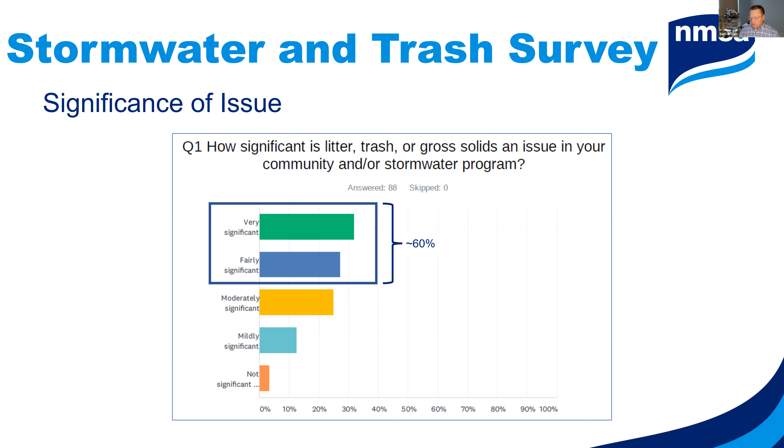So this checks the box on the question: is this something even worth getting into? Is there a lot of interest? Is it significant enough of an issue at the local level? And the answer that we got from this survey was yes, it is.

The second was we wanted to know about trash capture measurement - what metrics are used and who's doing this work. So the first was, do you even measure trash capture? And if so, do you perform trash capture, do you measure it, and if you do, who leads this effort?

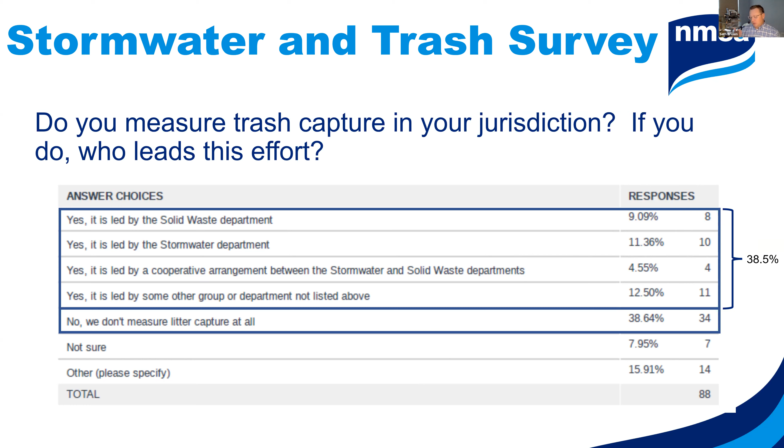So what we found is about an even split between those who say no and those who say yes, and then some that fell into the other category - not sure, or maybe they kind of do, kind of don't. But the point is that there's a significant number who do have trash capture programs. The other thing to notice is that there was not a consensus about who leads this - is it the stormwater program, the solid waste department, a cooperative, or something else? So not a lot of consensus there. That's interesting to know.

That's something interesting as a takeaway, I think. We wanted to know, how about metrics? How do you measure that? Again, this is not a consistent thing. We found there's an even split between looking at weight—whether dry or wet weight—volume, or something else. So clearly there's no consensus on what the metrics are related to measurement, or metrics related to trash capture.

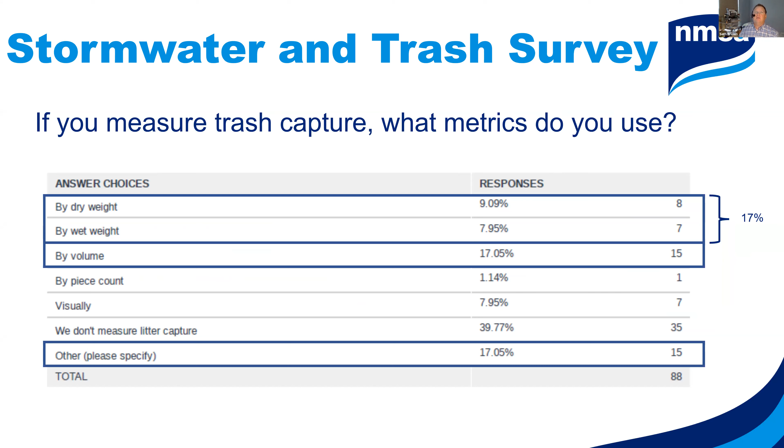That's another interesting takeaway that informs us what the challenges are for MS4s in stormwater and trash. We also asked about the elements—where does this land? If you've got a trash control or trash reduction program, where does this land? Not surprisingly, most of the time it's in the public education area. Public education outreach is part of the MCMs, the minimum control measures. Part of MS4 phase 2 permits is public education outreach and engagement. This checks one of those boxes very well.

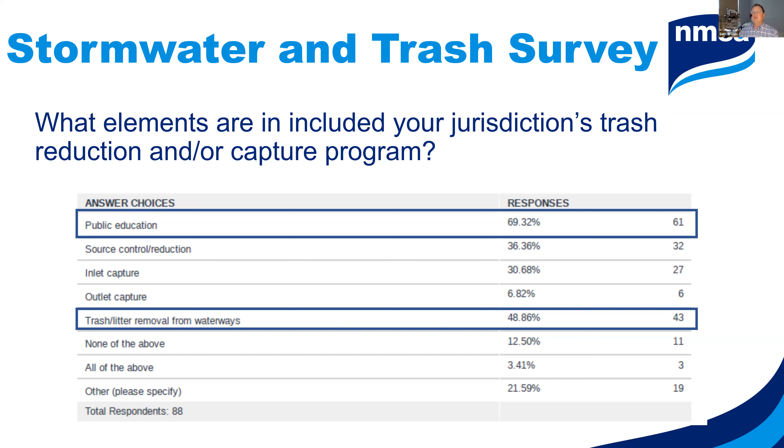It's out there—you see litter cleanups, stream cleanups, adopt a road or adopt a highway. All of those things tie in here. But there's also significant focus on just trash removal from waterways themselves—primarily saying we need to get this stuff out of our waterways, not just checking the box for public education. It should be noted that respondents could check more than one box in this context.

Something we'd heard as we went along with this effort with EPA in the Trash-Free Waters partnership we were involved with, was whether trash capture and trash in stormwater issues is a solid waste issue or a stormwater issue. And if it's a little bit of both, do solid waste and stormwater programs coordinate well? That was a premise we had—this could be a challenge.

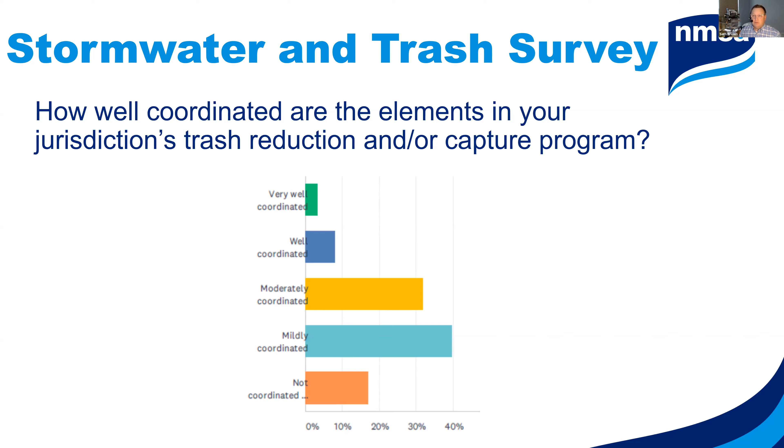Sure enough, we asked the question about how coordinated this is between the different departments that might be involved, stormwater groups or solid waste or others. It looks like moderate to mildly coordinated kind of dominate here. So there's an opportunity to try to increase this coordination to have more effective trash capture and trash reduction at the community level. And we asked what types of things could help make that happen.

Just help trash capture and reduction generally writ large. It's interesting to note there were multiple responses available to respondents, but you can see some stood out more than others. One is just looking at leadership and having webinars like this, frankly, a community of practice, an online resource. This is all information based—I think folks just want more information about how to do this effectively.

I think another interesting thing is there was significant, actually the most support, or the second most support, for a crediting system—and I know we'll hear about that on the California aspect, but we're looking beyond California as well. If there's a way to capture this and credit it in permits, then maybe there'd be more support for this. That's another interesting takeaway, I think.

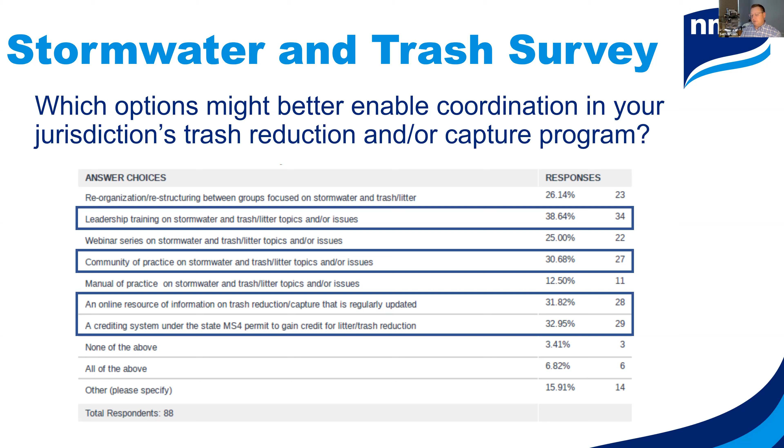So, okay, I'm going to wrap up now and just say that some of the major takeaways we had from this survey is, again, that it's a significant issue. There's this trash in general—I think there's just more awareness overall on plastics and the impact on the environment. So it's being seen as, or it is seen as, a significant or very significant issue.

Most communities have trash reduction or trash capture in their MS4 permits, but most do not track or report that at the same level. There's a lack of consistency in the metric of how much we capture - weight, volume, pieces, whatever it is. There's also a lack of consistency in who leads this, whether it's solid waste or stormwater or some other department. So there's not a consensus or consistency there, and no clear agreement on how to address this coordination.

There's a lot of different things we can do, but things like education, outreach, webinars, and community of practice seem to resonate the most. We also see interest in a regulatory crediting program to incentivize action. If this is going to be written into your permit, having consistent metrics and consistent crediting would generate more support as well.

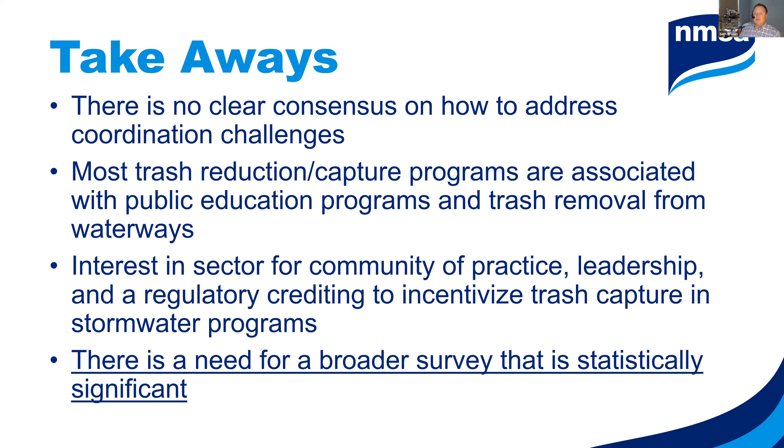One of the big takeaways is that there's a need for a broader, statistically significant survey - we want to do that. I did want to mention that NMSA is involved with the new ASTM Committee on Stormwater Control Measures, E64. They're developing a trash capture standard right now, based upon the Caltrans standard.

This ties into our stormwater testing program called STEP, which EnviroPod is a supporter of as well. So this is something to look for in the near future. We feel like standardization is going to help us move forward, and how we measure performance related to trash capture and reduction.

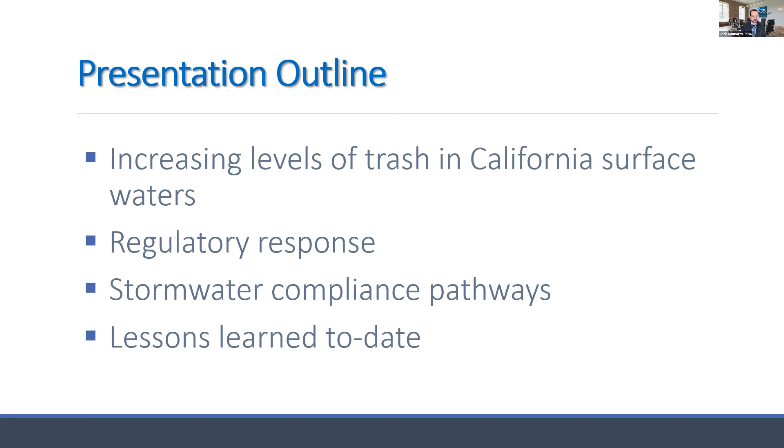I always like to start with this - California's definition of trash or litter. It's in the government code, and it basically comes down to a broad definition of any improperly discarded material - and it's not just plastic, it could be other materials as well - that's thrown or deposited on land or the waters of the state.

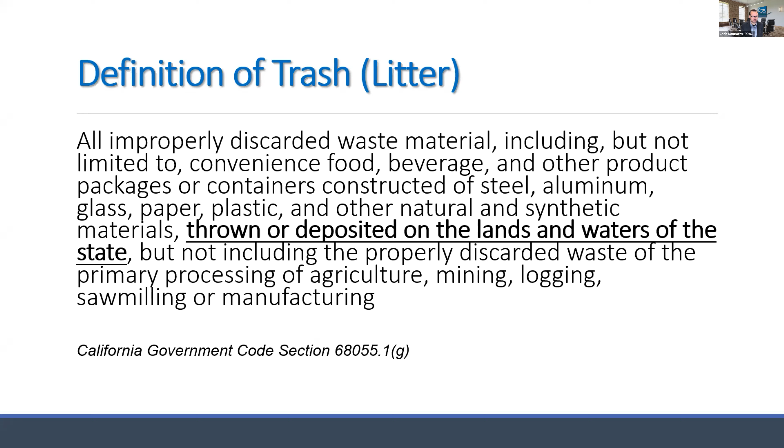One thing I want you to notice is that this definition of trash doesn't have any size associated with it. So although we've focused mostly, and my talk will be mostly on macro trash - greater than 5 millimeters in diameter - obviously there's been a lot of work, exponentially growing, on the scientific studies and our understanding of sources and impacts related to microplastics and micro trash that is less than 5 millimeters. So this definition covers that micro trash as well.

So I want to take you back to the late 90s, really when this first started to get attention from a water quality perspective in the state of California. Mostly that happened through documentation and observations, both visual as well as quantitative, of the levels of trash we were seeing in waterways.

So these are two examples here: one, the lower LA River. This is at a boom that still exists in the lower LA River, which drains a very large catchment.

Remember, the LA River is for those of you who've seen Grease, where they race the cars in the concrete channels—that was the LA River. That is the LA River.

Coyote Creek up in San Jose is a much more natural system. It has riparian corridors, downed trees, and woody debris, and it blocks the transport. This is in San Jose, in the South Bay of San Francisco Bay.

So the State Water Board and MS4s collectively started collecting data in receiving waters back in the late 90s and into the early 2000s, and it was really pretty alarming, the levels that they were observing.

It was documented that there were impacts to beneficial uses established through the California Water Code and under the Clean Water Act. Those include wildlife, recreation, and navigation as well where applicable, as well as recreational uses including aesthetics. So we have not only full body contact recreation for swimming, bathing, and beaches, but also Rec 2 beneficial uses.

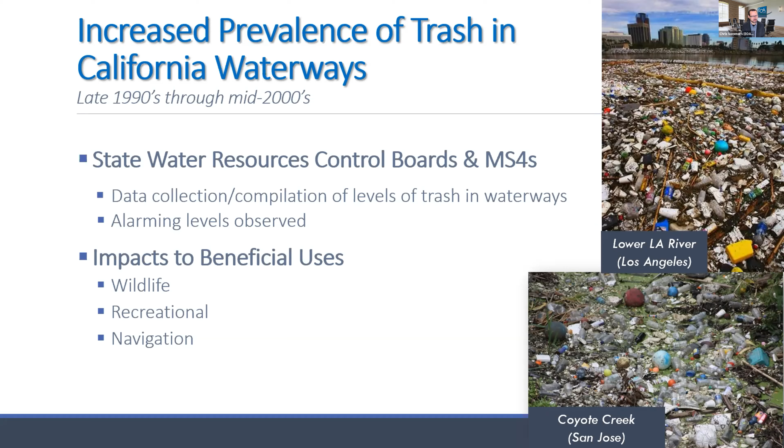Rec 2 includes pretty much just enjoying the natural waterways while you're next to them, picnicking by them, or hiking next to them. So this trash, not only from a wildlife standpoint, was potentially impactful, but also from a recreational standpoint as well.

Super important, especially for that last point, for California beaches. And so in the LA region and in the San Francisco Bay region, these data were used to list waterways in these two regions for impairments.

On the Clean Water Act 303(d) list as impaired by trash. And that really started the focus on: well, what are the actions that are actually going to be implemented? What's the program? In California, we have 9 regional boards that oversee water quality and 1 state board that oversees statewide policy. These 2 regions started to enact first the TMDL, which I think was possibly the second TMDL in the nation for trash.

That was back in 2008, adopted by the LA Regional Water Board. It established a water quality-based effluent limit for macro trash greater than 5 millimeters in MS4 discharges, basically saying there can be zero discharges of trash. They used the narrative standard to be able to establish this TMDL and the impairment.

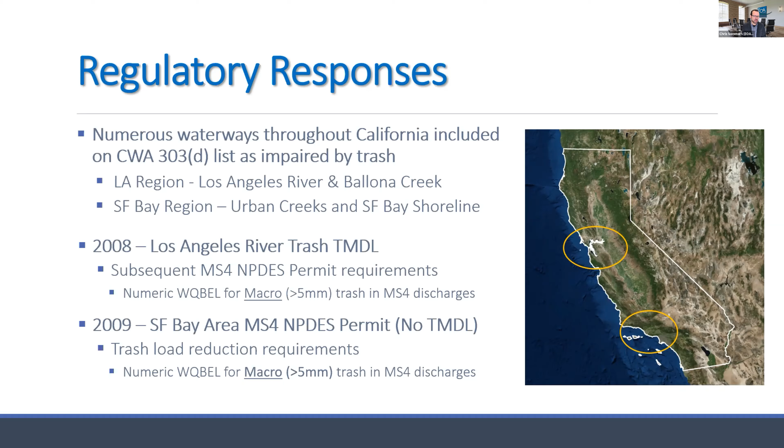But what the state did is it started to establish—it took a few years after that—but based on these 2 regions' efforts from a policy development standpoint, the state enacted a statewide adoption of amendments to the statewide water quality control plan. And it did 3 things.

One, it established a statewide narrative water quality criteria—a water quality objective, as we call them in California—for trash, which basically said no trash in adverse amounts in waterways. Secondly, it established a discharge prohibition for trash in stormwater and other pathways. So no trash in discharges.

And then third, it set, if you will, an alternative compliance program. And so it said, hey, instead of doing all these TMDLs on a watershed or water body basis, we're basically saying that all urban waterways throughout the state—and the data supported this—are impacted by trash, and that stormwater discharges are important pathways.

That seems to coincide with Seth's survey that people are realizing that stormwater discharges are important, and that we do have trash issues within our urban waterways that has grown over time. It also said that all stormwater dischargers can achieve the discharge prohibition by a time-certain date of 2030 at the latest.

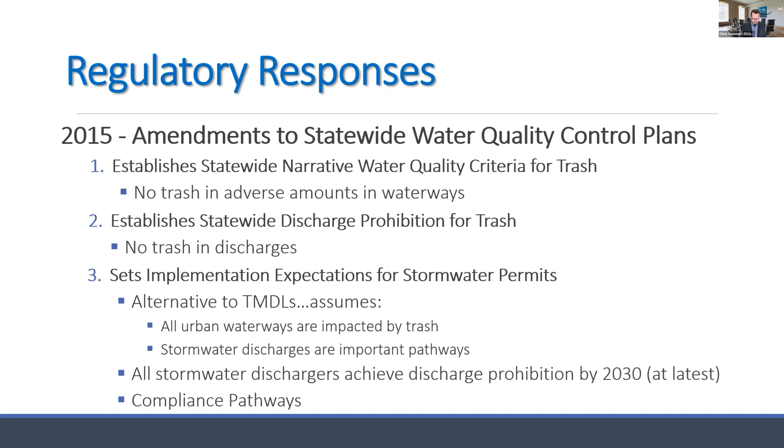And then they established these compliance pathways, which was really the important part—these alternative compliance pathways. So you can't hit zero in your discharge. What are we going to require you to do so that you're deemed in compliance with your discharge prohibition?

And so they gave two options, and these were the same options that basically were given in the LA region and the San Francisco Bay region. The first option was really the start of a whole industry of trash capture devices.

So it set a design standard based on data collected in the LA region: a treatment control, or series of treatment controls, that traps all particles greater than 5 millimeters—that macro trash definition—with design treatment capacity, a flow treatment capacity rate resulting from the 1-year, 1-hour storm event.

And so that set a standard that was used to start certifying full capture devices by the State Water Resources Control Board. And today there are over 40 of these devices now certified as full capture systems within the state of California.

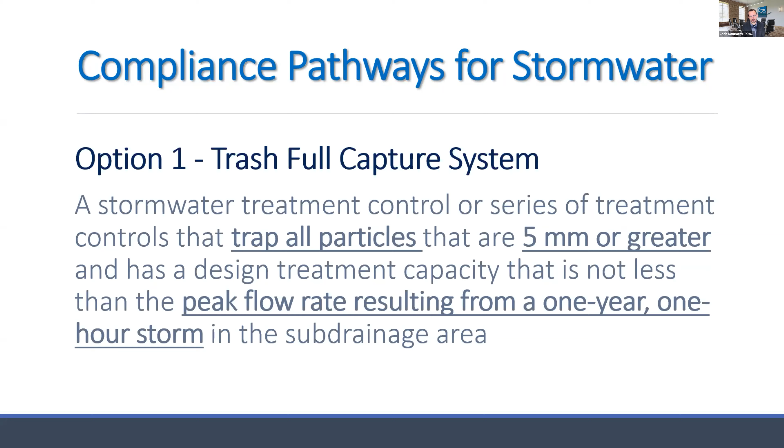There is an allowance for what they call multi-beneficial systems, which could include green infrastructure and other more naturally based systems. I work in the San Francisco Bay Area, so I help a lot of the MS4s throughout the region, just to give you a sense of where we are in Northern or Central California.

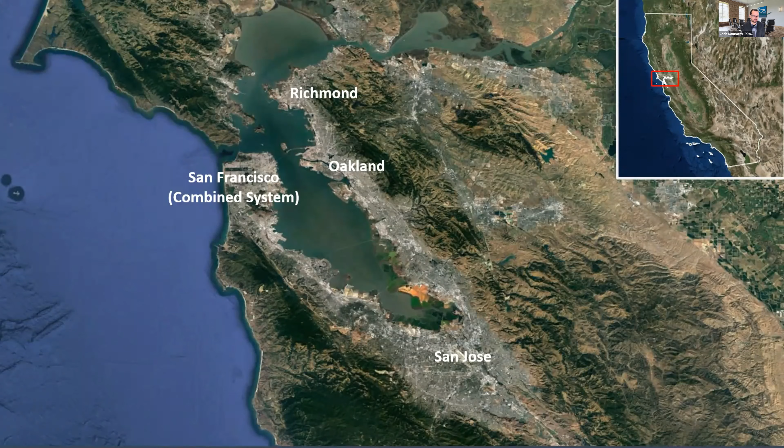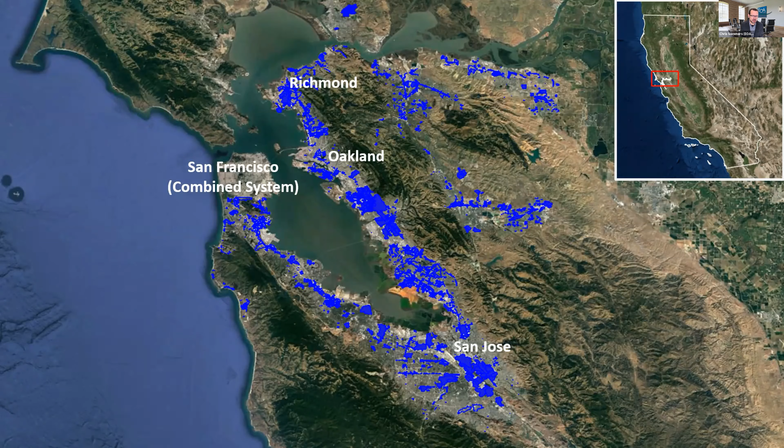I could show you a similar image for the LA region. LA alone has over 50,000 inlet-based devices and a number of other larger systems they've implemented as well. So a significant effort from a capital improvement program and retrofit program.

Option two is really everything else. It could include partially full capture systems to address some areas considered significant trash generating areas that drain to MS4s. But mostly it includes source controls, including what we call true source controls in California, which is really pollution prevention efforts, as well as institutional source controls, things like street sweeping and inlet cleanup.

These option two, or what they call track two systems or control measures in the state, have to be demonstrated as equivalent to the trash reduction that would occur if you installed a certified full capture system. So the question is, how do you measure that? How do you determine you're equivalent? They've established a process where you establish baseline trash levels on land, and then compare over time as a surrogate for the levels getting into stormwater and being discharged.

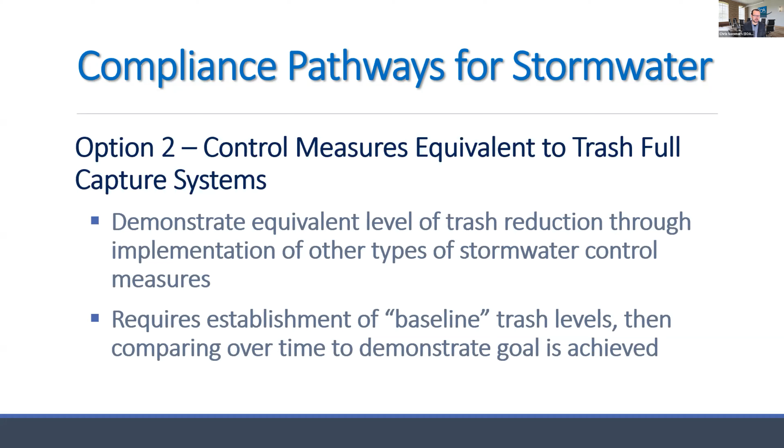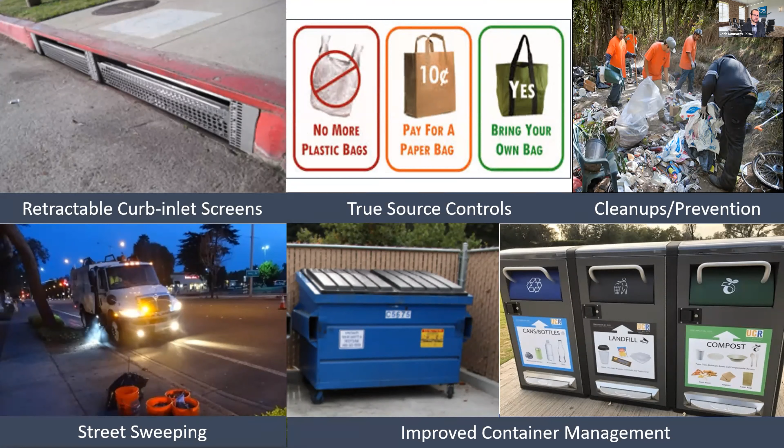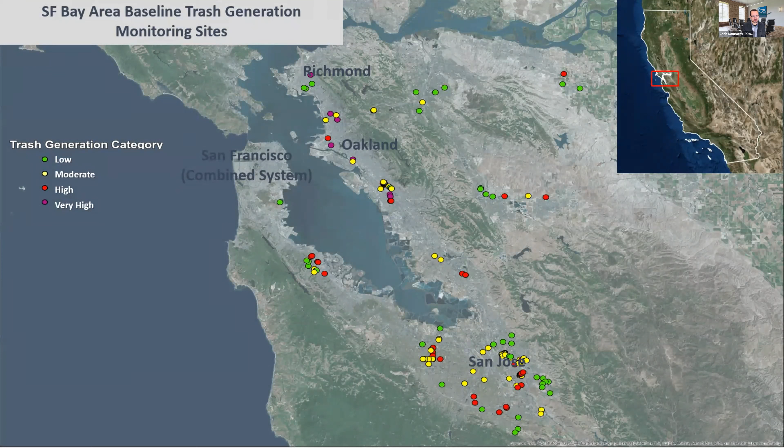So these are a few examples of both true source controls and institutional source controls that are out there. There's guidance on this—our state organization, the California Stormwater Quality Association, has developed guidance on the effectiveness of these systems. The measurement of these systems is really about establishing a baseline, which in the Bay Area was based on a study using probabilistic sampling of a number of sites, then superimposing those onto land areas based on modeled results.

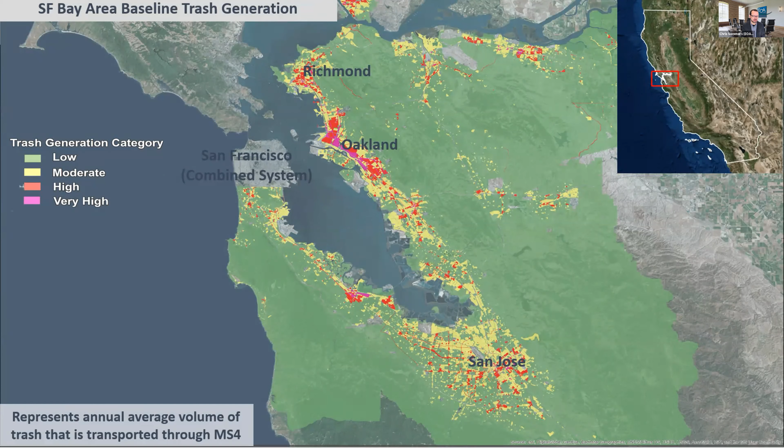As you can see here, the high or very high levels are red or pink on the map, the low levels are green. What we've been able to do is establish that if you can get to a low trash generation level and document that, you're seen as full capture equivalent. But these areas that are red, yellow, or purple are really where the actions need to take place, either full capture or equivalent measures, and through monitoring, document that they've hit that low trash generation level.

One way we do that is through on-land visual trash assessments, a protocol we developed that's now being applied at a statewide level. These are visual qualitative assessments of street links, streets and sidewalks, parking lots, trying to understand the relationship between what's up on land and what gets into the storm drain system.

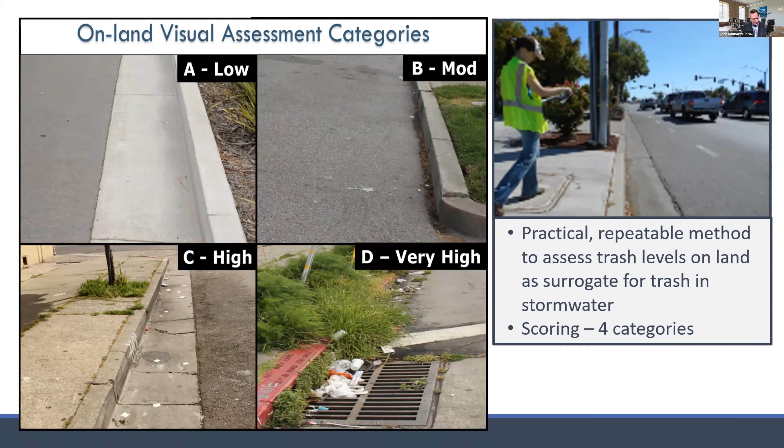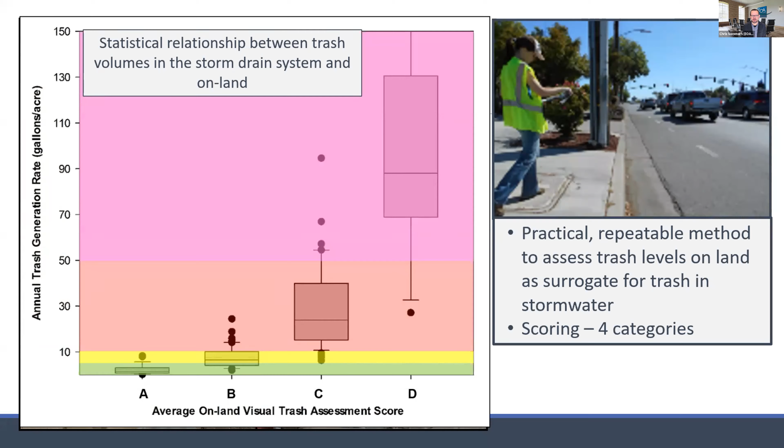Through that study, we were able to establish that the volume of trash measured through the storm drain system—the loading of trash—correlated with the on-land visual assessment categories. You see the green, yellow, red, and purple here in comparison to the volumes we see. So we use these A, B, C, D scoring categories to assess levels over time at selected sites throughout the landscape, then use those to demonstrate reductions over time. The goal here is to get to A scores pretty much everywhere—obviously a steep task.

Lastly, I wanted to go through quickly the lessons learned from the last decade. Some of this is consistent with what Seth was mentioning. Trash is found in pretty much all urban waterways at levels that are generally, from a public or water quality standpoint, considered unacceptable. That's getting better over time, but it's obviously a difficult thing to measure, given the measuring tools are not exactly quantitative.

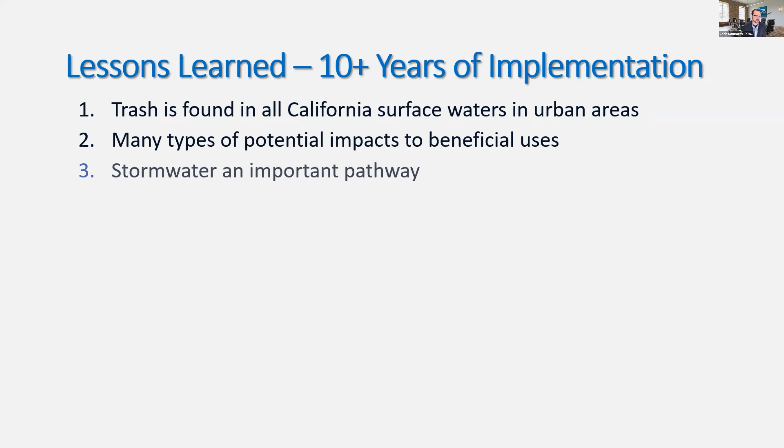There are many different types of impacts to beneficial uses, as I mentioned earlier. Through our work on receiving water monitoring and policies developed at the statewide level, the stormwater pathway itself is important. When we talk about land-based sources, stormwater is one of the pathways that gets into receiving waters, but there are also other pathways, which I'll mention in a second.

Through quantitative studies we've done through the storm drain system, more than 70% of the trash by volume is made of plastic. So plastics are kind of where the world is on the levels of trash we're seeing, and control measures need to try to reduce the levels of plastic.

We can do that in many different ways. The most cost efficient way is to try to get people to use less plastic and dispose of it or recycle it correctly. So there's a lot of focus on true source controls, things like single-use plastic bag bans, polystyrene bans for foodware, and looking at alternatives to plastics that could be more biodegradable.

A lot of work is happening at the local and state level on this focus. Secondly, there's a lot of focus on full capture systems, since it's a more direct compliance pathway that doesn't require significant ongoing monitoring, but it does require ongoing maintenance, which is a burden to resource-strapped municipalities.

The other is on-land. We've been able to see on-land visual assessment scores increase and get better, reaching those A levels based on actions happening up on land: street sweeping, on-land cleanups, working with businesses, neighborhood beautification work, business improvement districts, things like that.

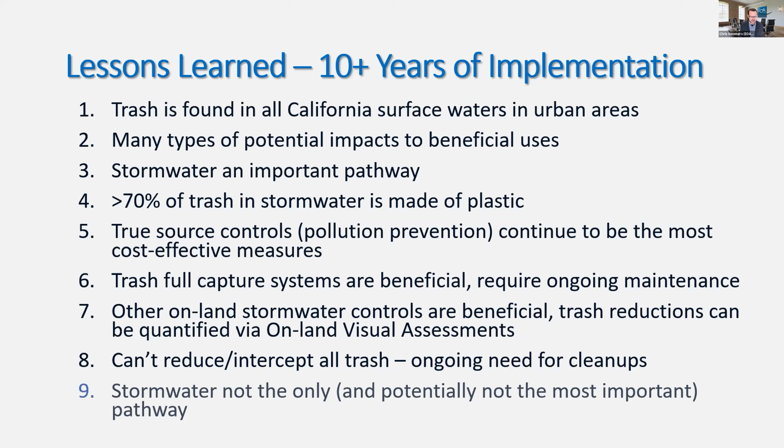Lastly, and I think this is a super important point, these regulations cover the pipe network that drains to waterways. Stormwater is regulated through the MS4s. But there's a lot of direct dumping into local waterways. Homeless encampments and unsheltered communities are a growing problem. California has about half of all homeless unsheltered folks in the nation, partly because of our climate and housing issues and prices. So there's an increasing homeless aspect to this, with impacts associated with those societal issues as well.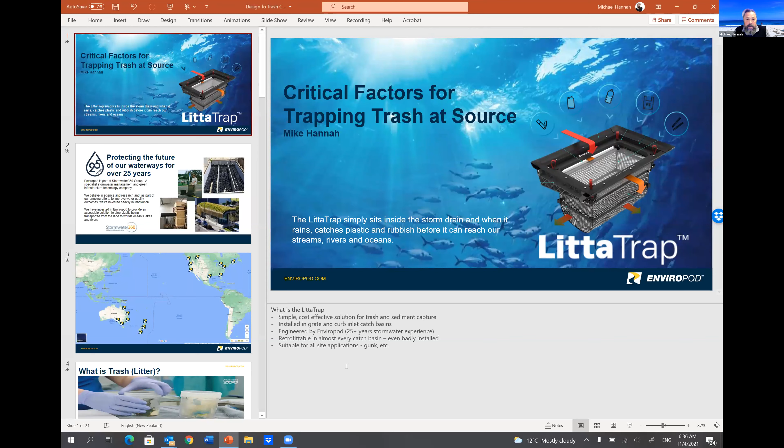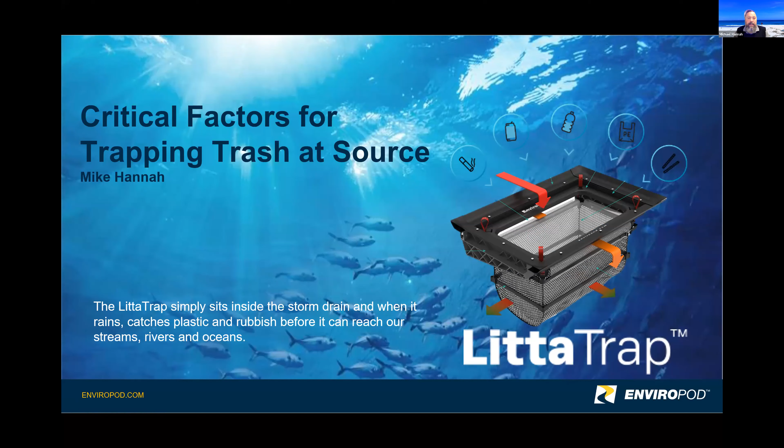I'm the technical director from Enviropod, and I'm going to talk about some of the lessons we've learned in developing our premier product, the Enviropod LittaTrap. We're a specialist catch basin technology company. We're new to many people in the USA, but we've actually been around for 25 years. That's a picture of me in the center there, back at the end of the 80s, sporting an afro and some flares. We're based in New Zealand, and New Zealand's in the middle of the Pacific Ocean, so we care quite greatly about the ocean and our waterways.

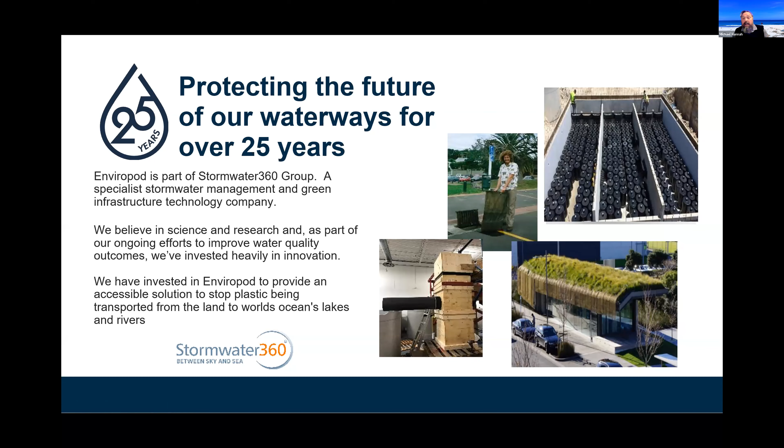We are a specialist stormwater company. Enviropod is part of the Stormwater 360 group, which deals with underground filters, green roofs, bioretention systems, and we really believe in science and innovation to tackle stormwater issues. We've got our technology installed across New Zealand and Australia. About 4 years ago, we set up in Canada, and this year we partnered with Clean Waters USA, distributing our technologies across the USA.

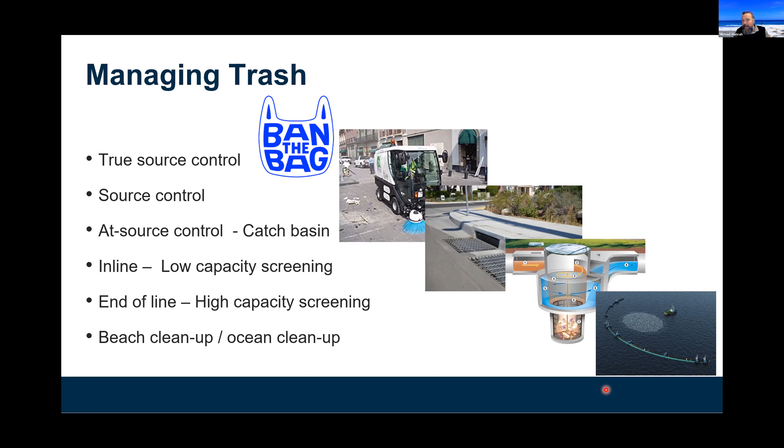Boyan Slat from the Netherlands, I think, is trying to clean up the Great Pacific Garbage Patch. I'm going to focus on at-source controls or catch basin controls, because that's kind of what we do and specialize in.

It's also in the setting up of these trash regulations across the USA, and the very first one, the Los Angeles River Watershed TMDL, did an analysis of the cost effectiveness of different types of full capture devices. At-source interventions or catch basin interventions had equal cost effectiveness as large end-of-line GPTs, or gross pollutant traps, or high flow screening devices. What wasn't so good was the inline or low capacity systems, because you needed quite a lot of them. They're quite expensive and it takes quite a bit to excavate and install them.

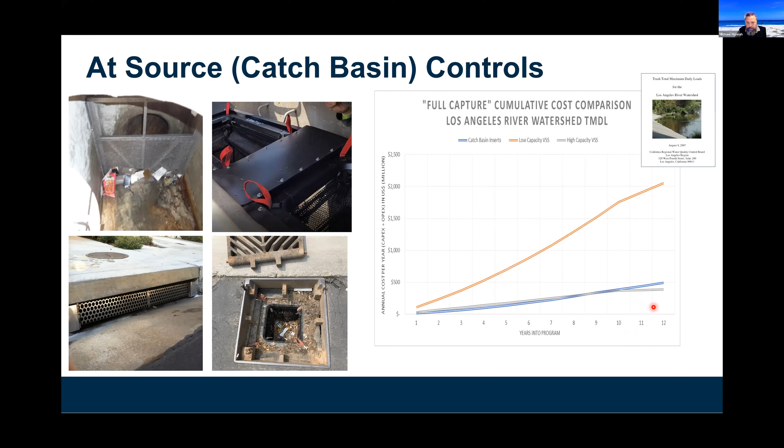So what is a catch basin insert? Essentially it's an intervention that can be installed in a new or existing catch basin. It enhances the water quality of that catch basin. It's not necessarily just the insert that's doing it, it's the interaction between the catch basin and the technology being placed in it. It doesn't require any construction, so that really lowers the capital cost, and makes it easy for people to get in and implement these systems.

But it does require ongoing maintenance, and its location at the entrance to the stormwater network means that maintenance is actually quite critical, because we don't want to cause flooding, we don't want to destroy public property, or even endanger lives.

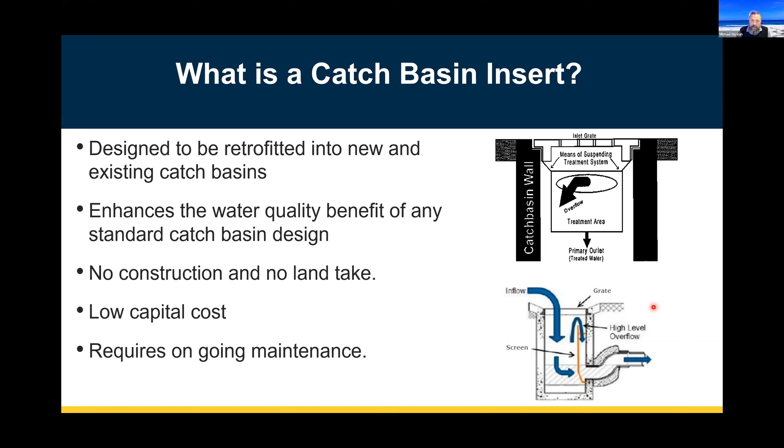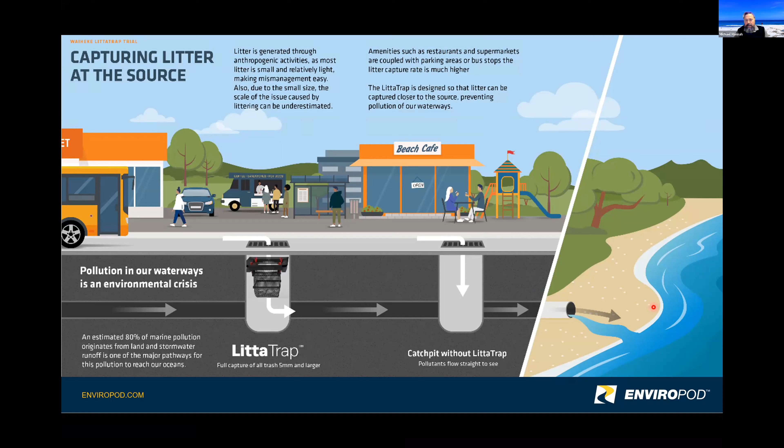So the other reason why at-source interventions are really good is because you can actually target the sources of litter. That's again why I call it at source. You can target the areas of high human activity where you're likely to have high trash generation, either industries and factories or outside shops and cafes. You can actually go out and target these areas for interventions rather than trying to capture everything from a whole catchment. We've done quite a bit of work on identifying what we call these trash hotspots.

We also find that areas like schools or reserves and public recreation areas have quite a high trash loading, but it's often very seasonal, depending on when people are actually using those facilities. So I'm now going to quickly move on to the critical factors in designing a catch basin screen.

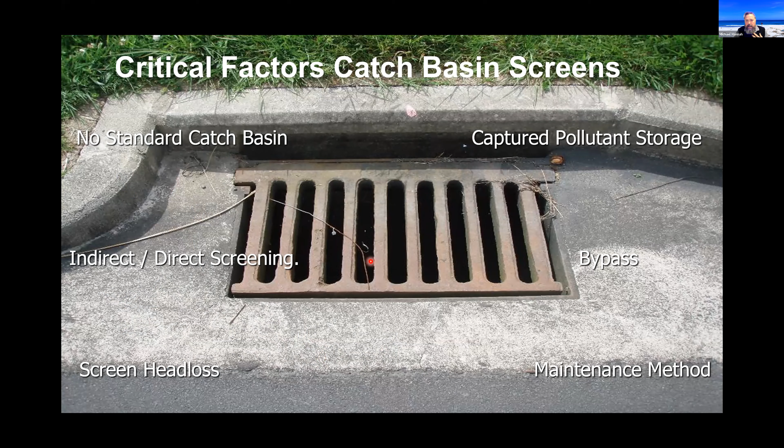As I said, I'm a civil engineer, so I'm quite technical on how the hydraulics work of these things, and I'm just going to quickly skim through this. So firstly, what is a catch basin, or what are the catch basin characteristics? Because your catch basin insert is going to be fitted into these things, that's going to influence the performance, as I've said. It's going to limit the performance, or limit what you can put in.

The issue is that there's no two catch basins the same. Basically, catch basins have been around since the Romans, and they come in all shapes and sizes across the world. They've been principally designed to get the water away and stop flooding, not to have something put in to capture trash or improve its water quality performance. So that's quite a challenge when you come to try to put something in.

So any device that goes in these things has to be really flexible to accommodate that variability in shape and size. Also, the key thing is that the shape and size of the catch basin will really dictate the performance you can get, like how much water you can pass through your device. If it's a bigger catch basin, you can put a bigger device in, such that you can pass more water.

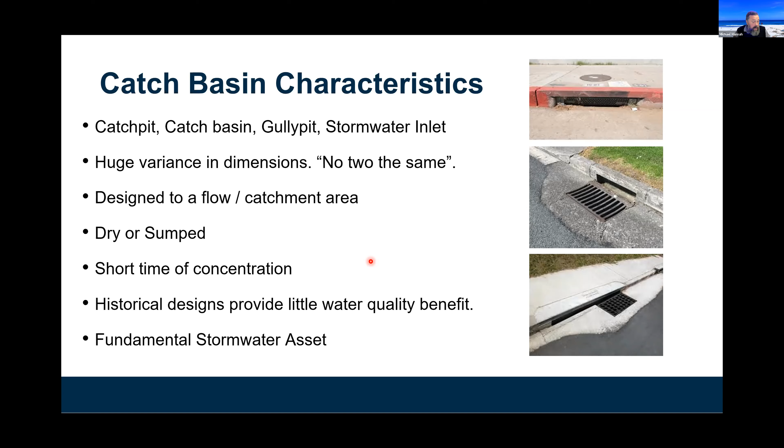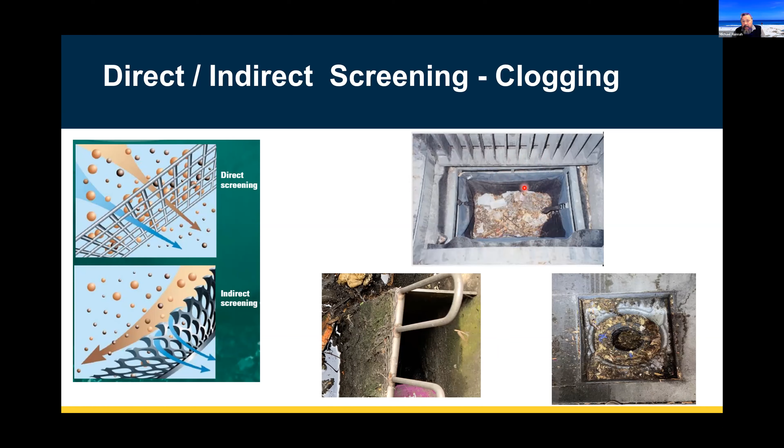On the top is a basket or box type screening device, and the water actually flows down over the walls of the basket as it falls into the base, creating some sort of self-cleaning. You can see the area on the top is clean, and the trash is stored at the bottom.

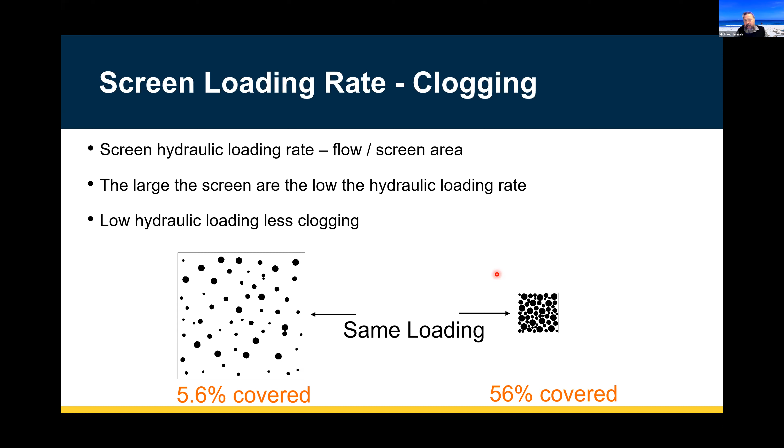Another critical factor is the screen loading rate: how much water are you passing through that screen per inch of screen? The smaller the screen, essentially the more water is going to be passing through, the higher the velocities are on that screen, and that's more likely that it's going to clog as a particle is jammed into that screen.

We also need to really consider the head loss of those screens, and head loss is quite critical in a screen, because that's really how much the water will well up in front of the screen before it passes through the screen. A low head loss fabric will allow you to pass more water. It gives you more capacity to well the water up, whereas a high head loss screen will tend to well up and go into bypass quicker than a low head loss screen.

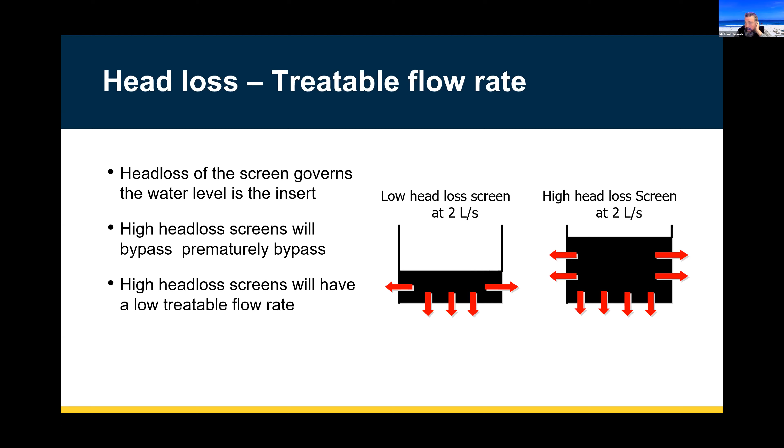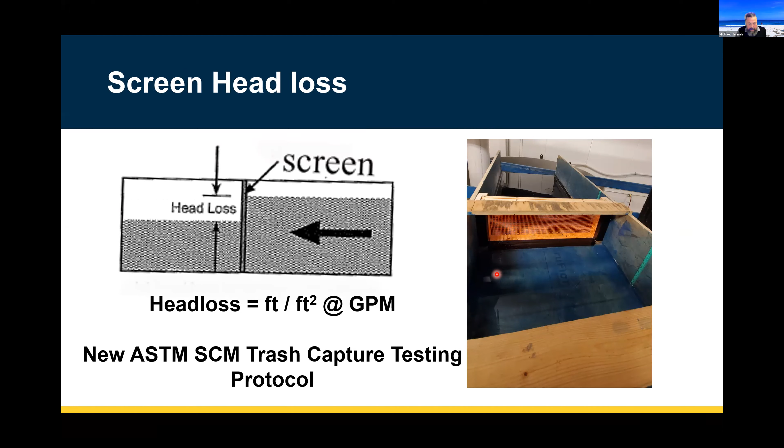So how do we measure head loss? Seth at the start did introduce the new ASTM stormwater control trash capture testing protocol. I'm part of that committee working on that new protocol. But essentially, head loss is the difference between the downstream level of the water and the upstream level of the water, upstream of the screen. That can be quite easily tested and evaluated in the laboratory. It's also very important to consider what the head loss factors are.

And it's not necessarily how big the holes are. Here's a little example: we have two screens. Screen B has bigger holes than screen A, but screen A has more open area and a more uniform shape. This graph shows the head losses, where screen B had a much greater head loss than screen A. Also, as flow rate goes up, head losses tend to elevate as well, because it's a function of flow and velocity.

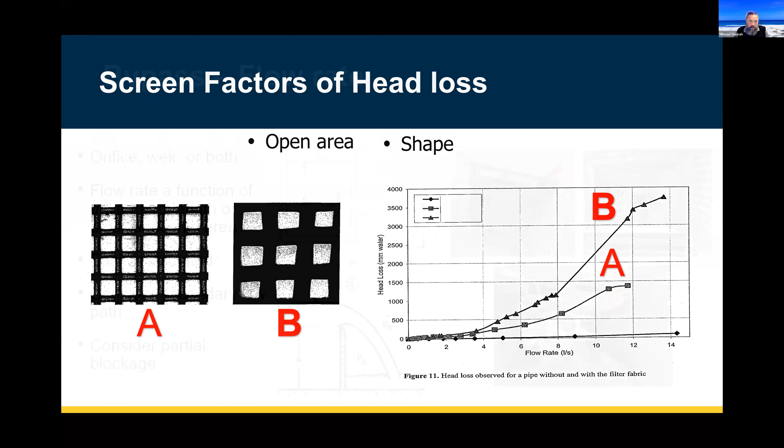Next is probably the most critical factor in any catch basin insert. Being installed at the entrance of the network, we can't have it clogging and blocking, and at higher flows, big 1-in-10, 1-in-20, 1-in-100 year events may need to pass around the system. So all catch basin inserts need some sort of bypass mechanism, either an orifice or a weir, which will dictate how much the water wells up above that orifice. The length of the weir or cross-sectional area of the orifice dictates how much water can go through.

Also, how far down in the catch basin the device is stored influences the amount of driving head that can push water through. It's also really important to make sure that once the water has gone through the bypass, it doesn't block up as it goes towards the outlet.

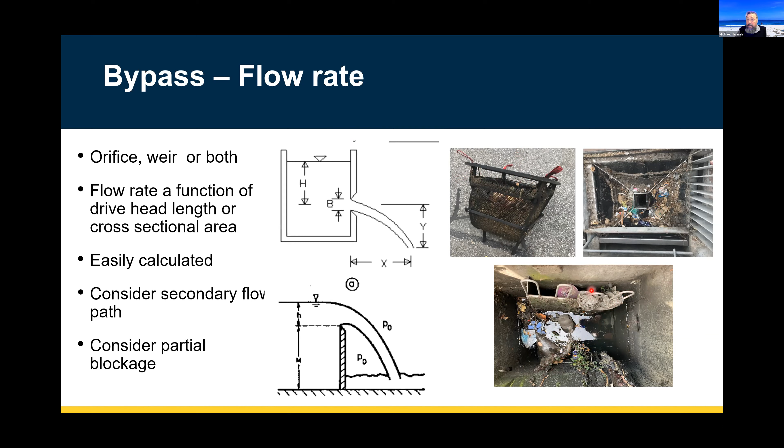On the right here I've got a couple of different pictures of bypasses. This basket system has quite a large slot at the top. This is a bypass in the center, quite a small hole. And the one on the bottom has more of a weir-type bypass, but it's fouling with large gross pollutants as it goes through the bypass.

Next critical factor is pollutant storage and where the pollutants are stored, because that impacts the flow rate through the device. As pollutants are stored within the device, they tend to block up the screen, giving you less available screen area and less driving head to pass water through. To manage this, the bigger the catch basin, the bigger the treatment device you can fit, and therefore the more storage volume you can have.

It's also really important to consider the flow rates through that screen as the device fills up. To get part of the certification process with the California Water Board, you need to show your flow rate at different levels of fullness inside the catch basin.

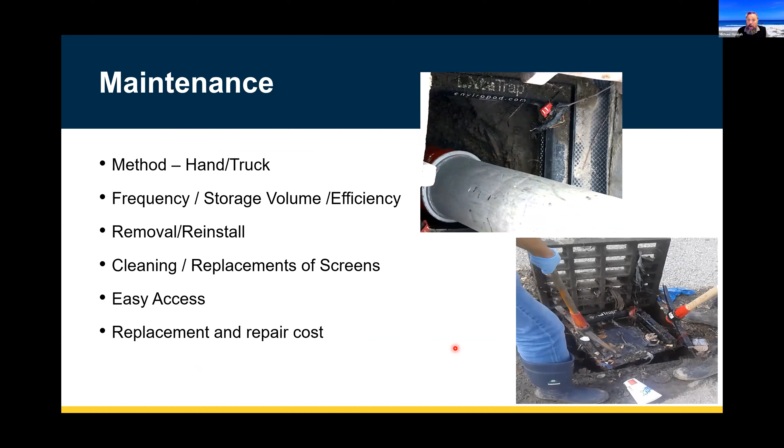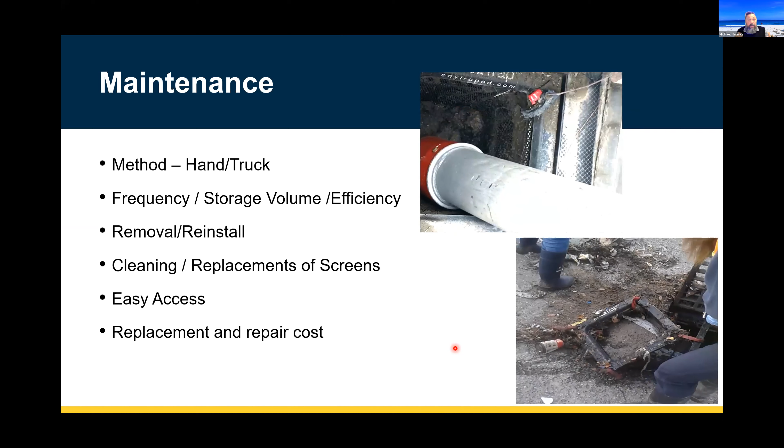Lastly, and probably the most critical thing, is maintenance. There are really two methods of maintaining catch basin inserts: by hand or by vactor truck, but it comes down to a simple case of economics. A vactor truck costs roughly $350 an hour - nice and quick to maintain a device - but if a device can be maintained by hand, two people and a pickup truck is roughly $600 a day. So if you can maintain your catch basin insert or trash control device by hand, it's going to significantly save you money.

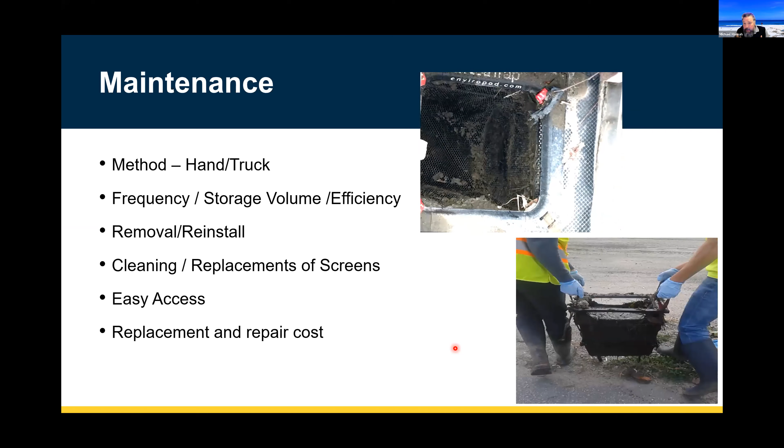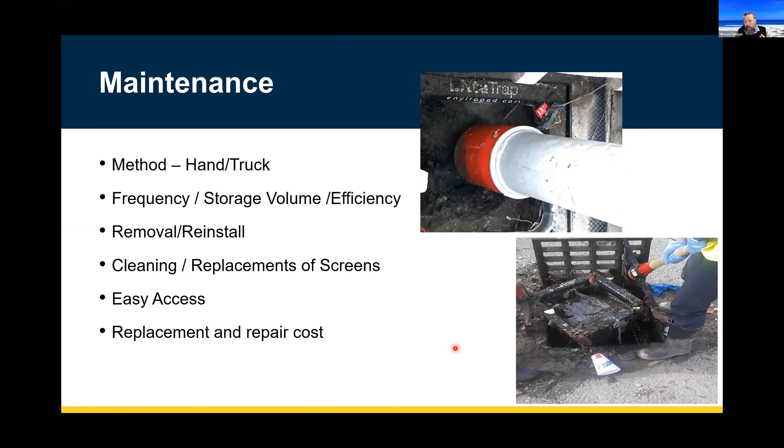Good access, as these two videos are showing, is really critical to be able to maintain a device. You also need to consider that you might need to remove the device and clean the screen sometimes, because it might clog up and blind with all the organic material coming through.

So quickly, to summarize: trash is a different kind of pollutant compared to other stormwater pollutants. Trash traps can trap large volumes of trash, but also organics. At-source treatments can be a very cost-effective way to manage trash in urban areas, largely through hotspot targeting - you don't need to put a trap in every catch basin to get a large capture of gross pollutants or trash. The critical factors when designing a catch basin insert are the type of screening mechanism, whether it's direct or indirect, because that affects clogging. Your hydraulic loading rate also affects clogging. Your head loss and bypass are critical for how much water can go through the device without causing flooding. And lastly, maintenance - where your pollutants are stored and how you're maintaining it is really the biggest cost factor when looking at these treatment devices.